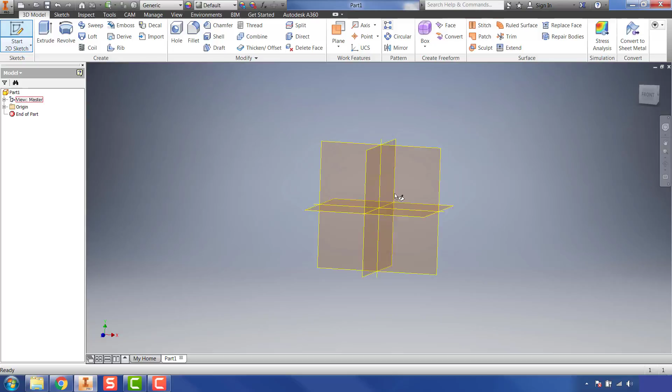So the final part for activity 5.5a is the wheel, the Automoblox wheel, and this is actually a simplified version. And this is available in your activity sheet, which is located in Canvas under 5.5a. So I have a new part open here. I'm going to start a new sketch, and I'm going to work on the XY plane.

And if you look at the activity sheet, it's actually a set of 4 concentric circles. So 2 interior and 2 exterior larger circles. So the first thing I'm going to do is grab the circle command. I'm going to create my first circle, and the dimension it provides me for that is 0.440. And then I'm going to create another circle, and it's actually a smaller diameter circle. And I'm just going to click in here anywhere just to place it.

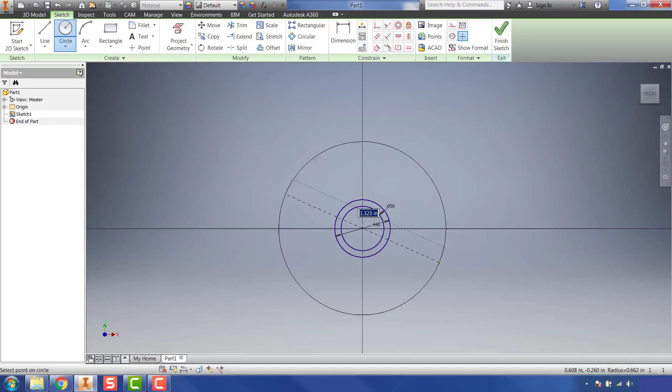And then I'm going to grab my dimension command, and I'm going to dimension between this initial circle I made and this interior circle. And that dimension on your dimension sheet is 0.05. I'm going to create my next circle, which is larger, so I'm going to start in the center point, and approximate what size it is, somewhere around there. I'm going to use my dimension command, and the dimension between this circle and this circle I just generated should be 0.35.

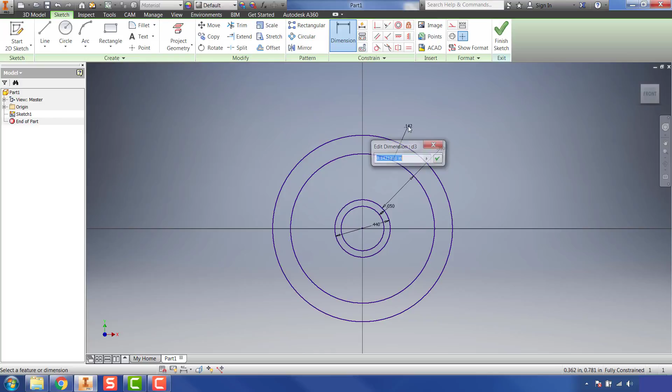And then I'll create one final concentric circle, and I know that dimension between those 2 exterior circles should be 0.05. Once I have that, I'm going to go ahead and finish that sketch, and I am going to extrude both the exterior circle and the interior one, and I know that depth should be 0.57. So once you make this, you should have 2 cylinders, an interior smaller cylinder and then an exterior cylinder.

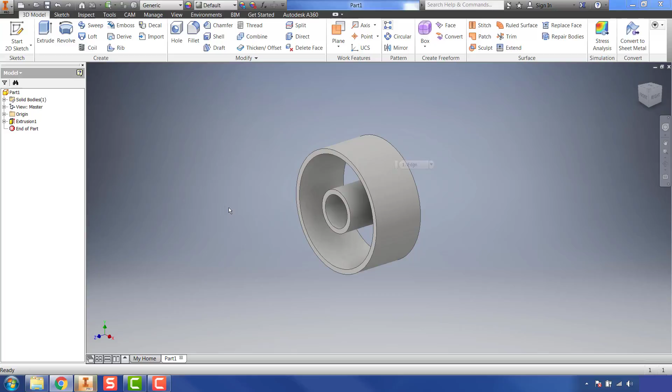Next, you're going to create the extrusion that goes in between these 2 cylinders. So I'm going to grab a new 2D sketch, and I'm going to start my sketch on this face here. You could either start it on this face or this interior one. It doesn't matter because they're on the same plane. And I need to create a circle that's on the inside of this external cylinder, and on the inside of this internal cylinder as well, because I want to make my extrusion between those 2 points. So I could grab a circle, or start it in the center point and create each of these circles.

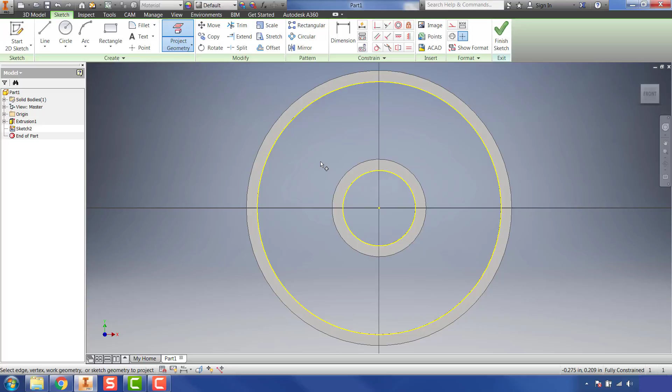But the easier way is to use my Project Geometry button, and I'm going to click on this interior circle, and that creates that sketch of that circle for me. And then click on this one as well. And what Project Geometry does is it projects geometry from previous features to this current sketch. So once I create those 2, I'm going to hit Finish Sketch, and I'm going to select that geometry to extrude. Now for this one, we know based on our dimensions that the extrusion should be 0.05.

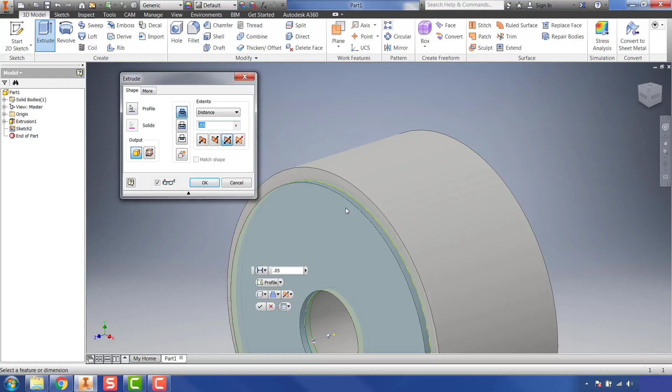But what's really important to note is that this is only extruding one way, and this needs to be a mid-plane extrusion, or a symmetric extrusion. So you'll notice we have direction 1, direction 2, symmetric, and asymmetric. If we select the symmetric one, that's our mid-plane, and we zoom in, what we'll notice is that it extrudes 0.05 inches, and half of that is in front of the plane and half of that is behind, and that's the type of extrusion we want. So we'll click OK and finish that extrusion.

Now we need to go in and create our cutouts. So we're going to create a new 2D sketch on this front face of the extrusion we just created. And I'm going to grab the circle command, and the center point of this initial circle is going to be at the intersection of this circle and my origin axis here. So I'm going to click that. And on your sheet it shows a dimension of 0.25, but on your sheet it is dimensioning an arc, and we in this case are creating a circle. So when you have a dimension for an arc, it's always going to be radius. When you have a dimension for a circle, it's always going to be diameter. So our dimension here is actually 0.5.

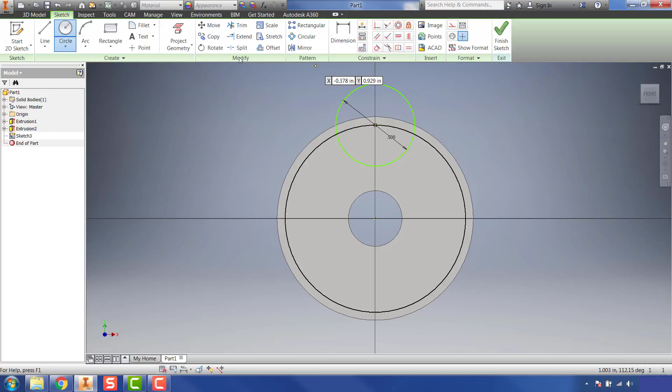Once we create that, we're going to go up to the Modify panel, grab the Trim command, and we're going to hover over this outside part of the circle, and you'll notice it turns it into a dashed line, and if we click on it, it'll trim it right off to this existing circle. And once we do that, we can go ahead and finish sketch. Grab the Extrude command, select that profile, select Cut, cut through, and hit OK. Now this obviously doesn't look like the wheel because we're missing the rest of our cutouts.

So we're going to use the circular pattern tool to pattern the rest of this shape. The first thing we need to do, though, is we want to pattern this shape around the center axis of this cylinder, and we don't have that axis, so we need to go up to our work features, like in a previous activity, grab the axis command, and if we click on this cylinder, I'll zoom in a little bit, you'll notice that yellow axis appears. That's actually a work axis, which also appears over here in our browser as well.

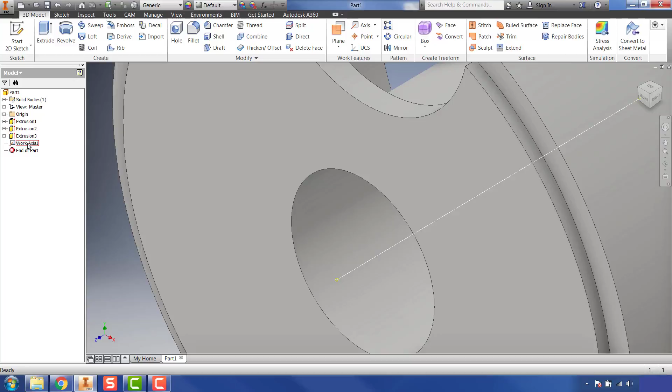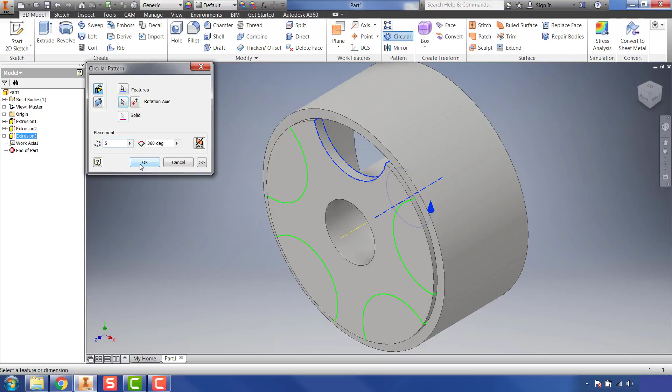So now I can grab the circular pattern command. I'm going to select just the edge of the feature I want to pattern. Then I'm going to come to my panel and hit the selection tool for rotation axis. Select my axis I created. And it defaults to 6. We only need 5, so we'll change this 6 to a 5 and hit OK. And that has patterned that 3D feature all the way around. You could have also done this as a 2D sketch, patterned the sketch, and then extruded all 5 of them. But this generally is an easier and quicker way of doing it.

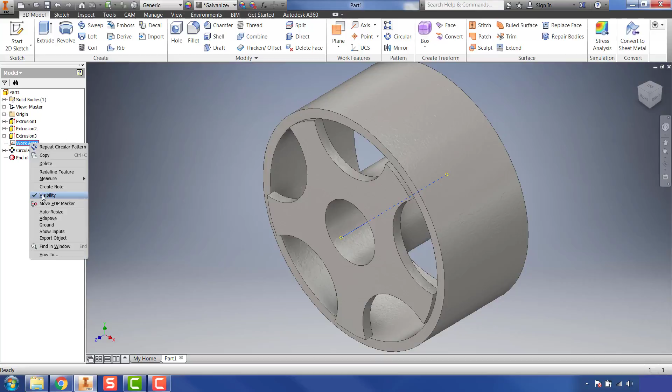And once you're done with that, if you'd like, you can go up to the materials drop down and assign a material to it. I'll just choose this galvanized for now to give it a metal look. And you want to make sure to go over and right click and get rid of the visibility on your work axis, and then your part is complete.